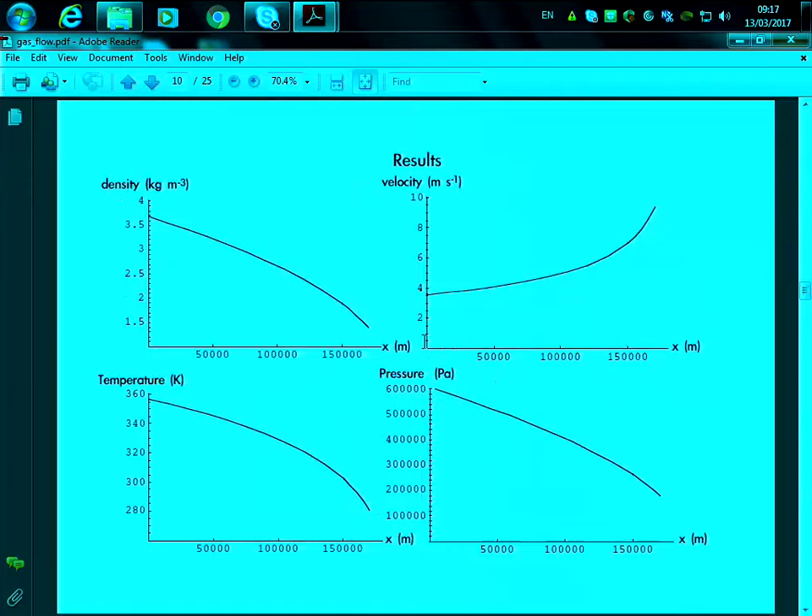So we will look at the same pipeline system that we saw in the previous lecture, but now we will assume adiabatic behavior, and we will use the cubic equation of state instead of the ideal gas law to approximate this relationship.

Again, these kinds of calculations, what you have to do normally when you have a complex problem, is define which equation of state you are going to use, define some initial inlet parameters, input that into a software modeling tool, and get the result. Normally this type of software will not solve it if you don't give the right initial conditions and select the right equation of state, to be sure you are getting a realistic solution.

So again, going back to the three differential equations used for compressible or incompressible flows, to specify the mass balance, momentum balance, and use them to obtain the energy balance. The way pressure changes with distance can be related to density and temperature changes using the equation of state, something I've already mentioned.

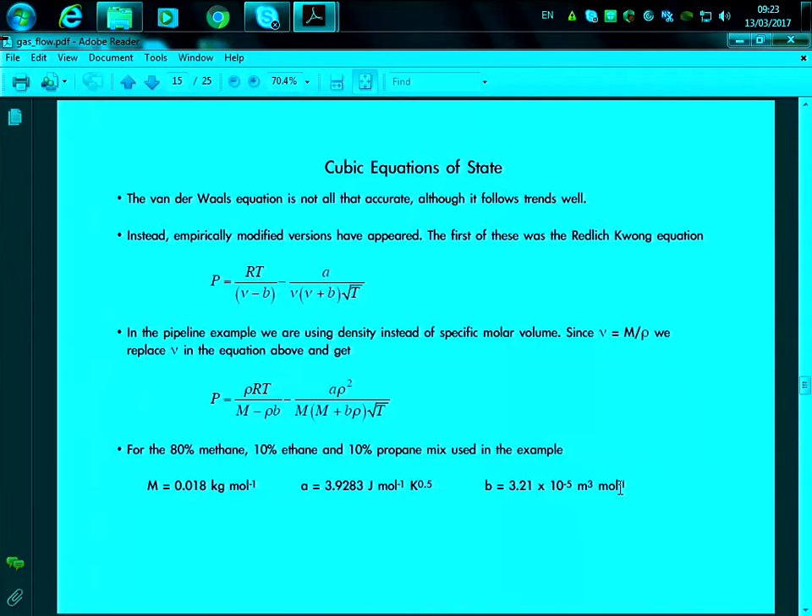So let's take an example. If we have a mixture of, for example, 80% methane, 10% ethane, and 10% propane, this will be the activity coefficient and the minimum volume defined for this property, and this will be the molar quantities going into that.

So how many solutions will an equation of state have? Do you know? As many as the order of the equation. So how many? Three. We will have three solutions in the equation of state, in this case the cubic equation of state.

So in this case, for example, we have the approximations that were done to solve a problem with the specifications denoted before, and this is just to let you know what the three solutions will look like that you can observe. So a cubic equation of state generates a curve, and normally you will have three points where you will have the solutions.

So normally the lowest value in this case will correspond to the value of the vapor density, and the highest value will correspond normally to the liquid density of the system. If we go to pressures above the critical point of the system, then we will in fact get 3 answers, but 2 of them will be imaginary. So above the critical point we actually get only 1 answer, which is correct, which will be a real answer in the system.

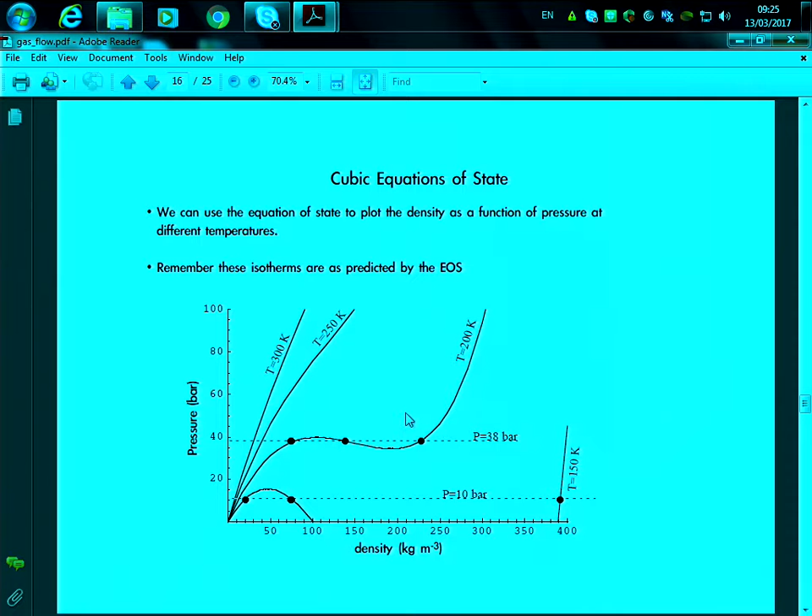So over here this will be the isotherms at constant temperature, so we can see the different temperatures and the isotherms, basically, and how the system is solved.

Now, why do we need to account and use a cubic equation of state? This is basically a chart to show you the changes within a system that is ideal. So this will be the density calculated using the ideal gas law approximation, PV equals nRT. And this is the density calculation using the Redlich-Kwong equation.

So we can see how this approximation deviates from 1. As we increase the pressure, the deviation becomes higher and higher. So if you were to use the ideal gas law at this pressure and the Redlich-Kwong equation, you will get 1 in both cases in terms of calculating the density changes through the system. So that means that the ratio between one and the other, you get basically the same answer. But as you increase the pressure, the answer with the non-ideal gas law will deviate from the ideal gas law.

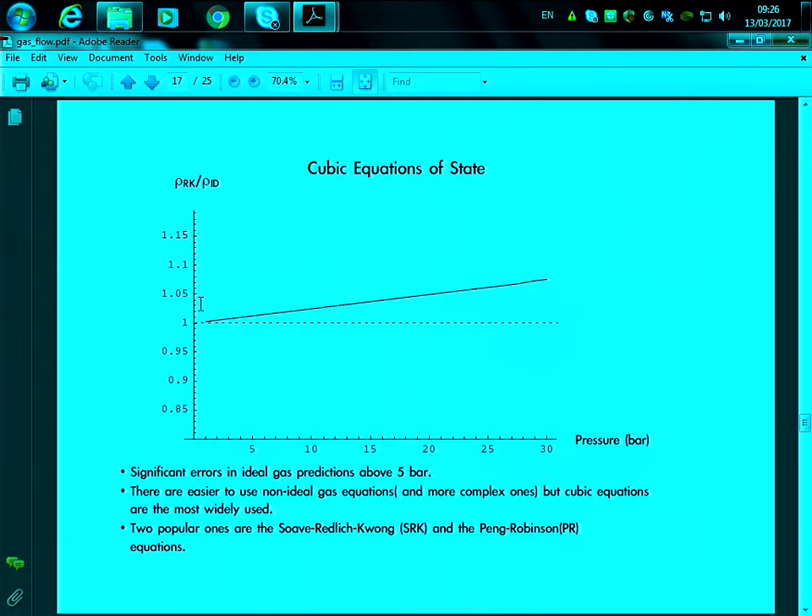And it deviates, well, let's say this is more or less 5% in this case. So that's why we need to take into account the non-ideality of the system at higher pressures.

So by substituting everything into the equations that we saw at the beginning, mass balances, momentum, and energy balances, and using the Redlich-Kwong equation, we get this type of approximation. This basically tells you the differential of the changes of pressure through the distance will be related to the changes of temperature through the distance and the changes in density through the distance as well.

Normally, in order to make this system a little bit easier to solve, we can define two variables, kappa 1 and kappa 2, and define our equation as the changes in pressure over the length of the pipe will be kappa 1 times the differential of T over dx, and kappa 2 times the differential of density over dx. So basically we're substituting these very large equations by these variables in order to make an easier expression.

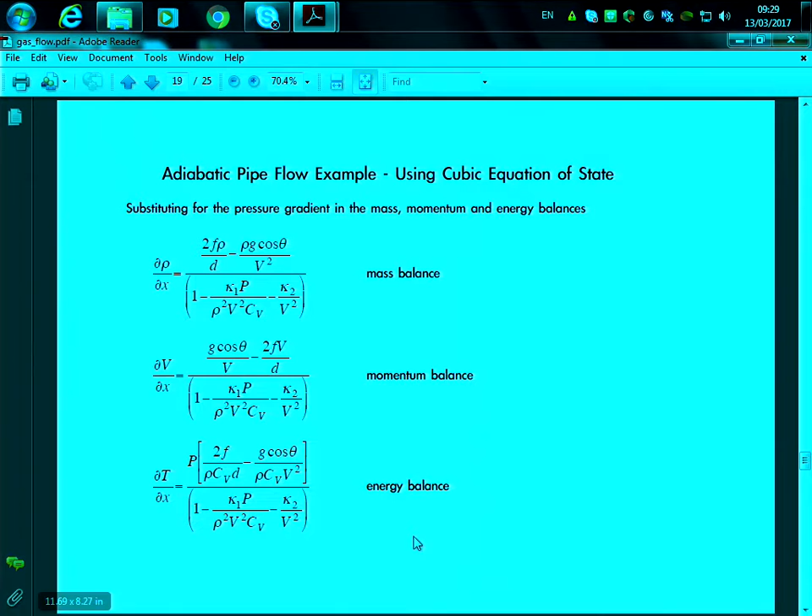So substituting the pressure gradient in the mass, momentum, and energy balances, we basically get these equations with the kappa terms in here, and that will be the system that needs to be solved for the pipeline. So we will look at the changes of density through the length of the pipeline, the changes of velocity through the length of the pipeline, the changes of temperature through the length of the pipeline, and the changes of pressure that was in the previous equation.

So the model will basically give us these results where we have a chart which tells you the changes throughout the length of the pipeline. So here we have the changes in density through the length of the pipeline, changes in temperature through the length of the pipeline, pressure, and changes in velocity, which you can now look at these relationships and see whether they make sense or not.

So as the fluid goes through the pipeline, is it right that the pressure is going down? Will it be coherent? And so why is the volume going up? The gas is expanding because it's losing the pressure. Now, why does the temperature decrease as it goes through the pipeline?

Expansion. The density of the gas reduces. Because of the surrounding... No, this is adiabatic, an adiabatic system.

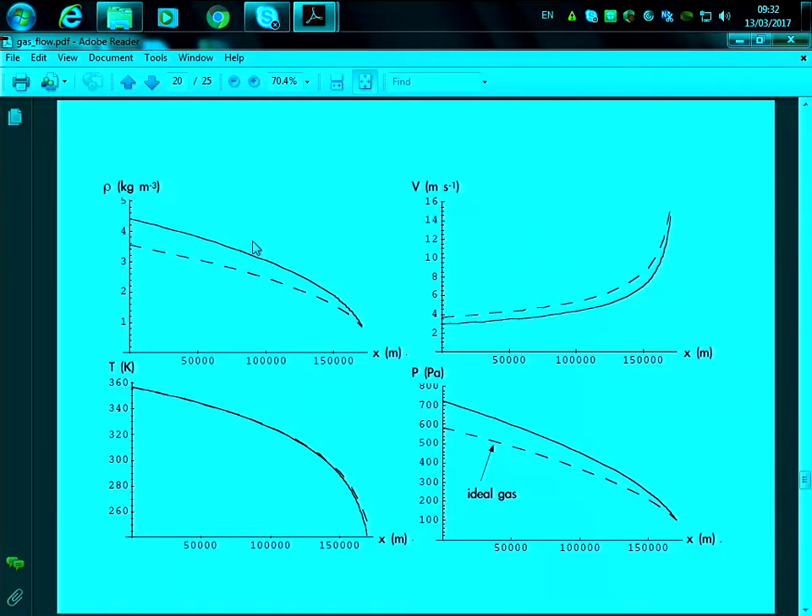So here we have a comparison between the ideal gas and the cubic equation of state, and basically these will be the conditions. In the cubic equation of state, if you remember the problem we had before, we needed the inlet pressure. What was the pressure in order to solve this? Here we solve it as the ideal gas law, and now we are solving it as the cubic equation of state.

We can immediately say that the cubic equation of state is telling you that you will require a higher pressure. So if you were to use the ideal gas law and buy a compressor, perhaps your compressor will not achieve the pressures that you require to deliver at the conditions that you want. So the cubic equation of state in this case will be a better approximation and will give you the right work that you need.

Now the density of the outlet, the velocity of the outlet, and the temperatures of the outlet also changed between the cubic equation of state and the ideal gas law. So the majority of the differences will come from the inlet pressure, which in this case will be 20% higher, and the outlet temperature, which will be lower in this case.

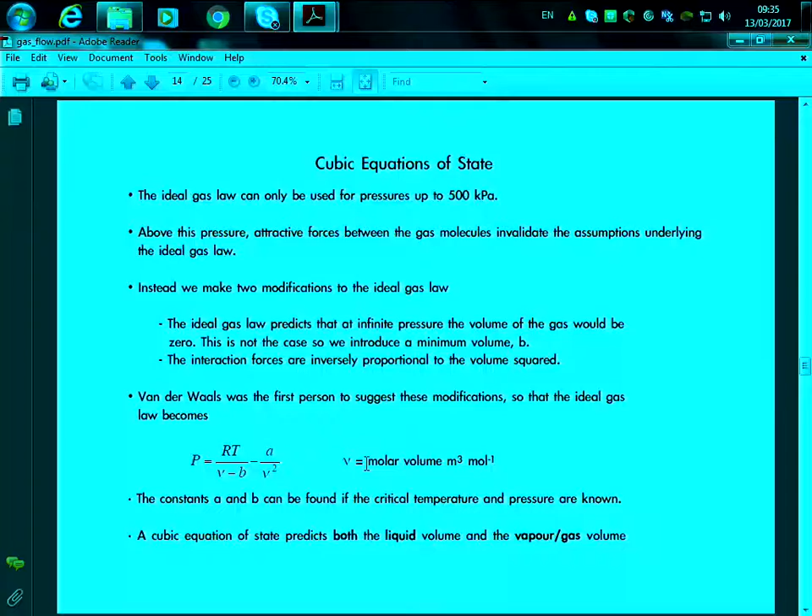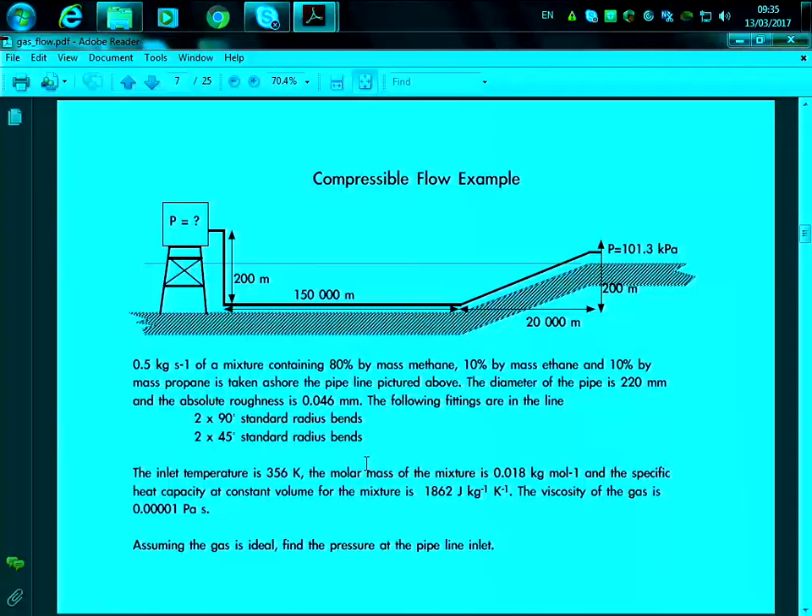Remember the last problem we solved on Wednesday. We actually wanted to deliver at atmospheric pressure, and we wanted to know the pressure at the inlet needed to go through the whole system and deliver at atmospheric pressure. So last time on Wednesday, we approximated it using the ideal gas law, and this time we approximated it using the cubic equation of state. We're looking at the differences that a cubic equation of state or an ideal gas law approximation will give you.

So the most important thing as engineers is actually selecting the right equation of state to use for the system. In this module, we're just going to look at these two equations of state, but there are thousands of equations of state depending on the fluids and pressures you are working on. When we go to the HYSYS software, you will see there's a list of equations of state, and you only have to select the one you want to use.

So that's basically how we use modeling software in order to solve compressible fluids, when we take into account the changes in volume.

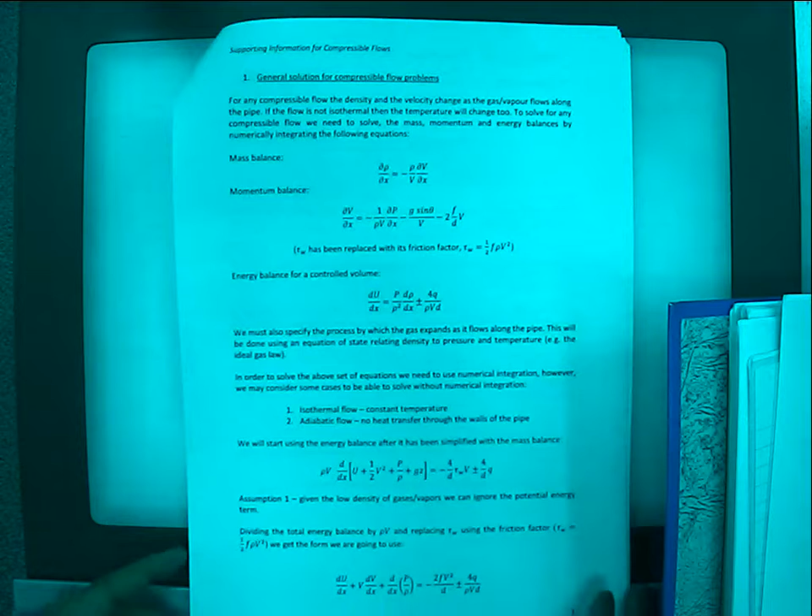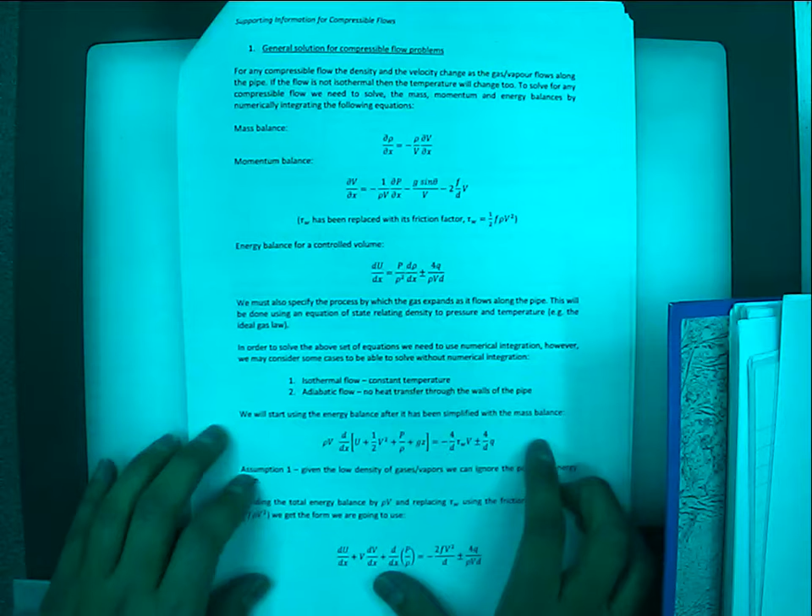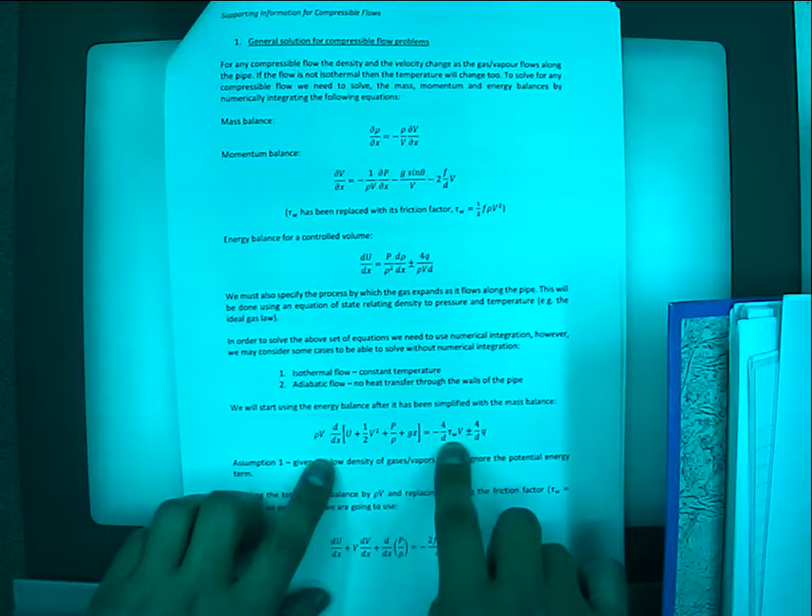So you have your handout in there, and basically, if you remember, this is the general energy balance, right? Internal energy, kinetic energy, pressure energy, potential energy equals friction through the pipeline plus heat flow in there, right?

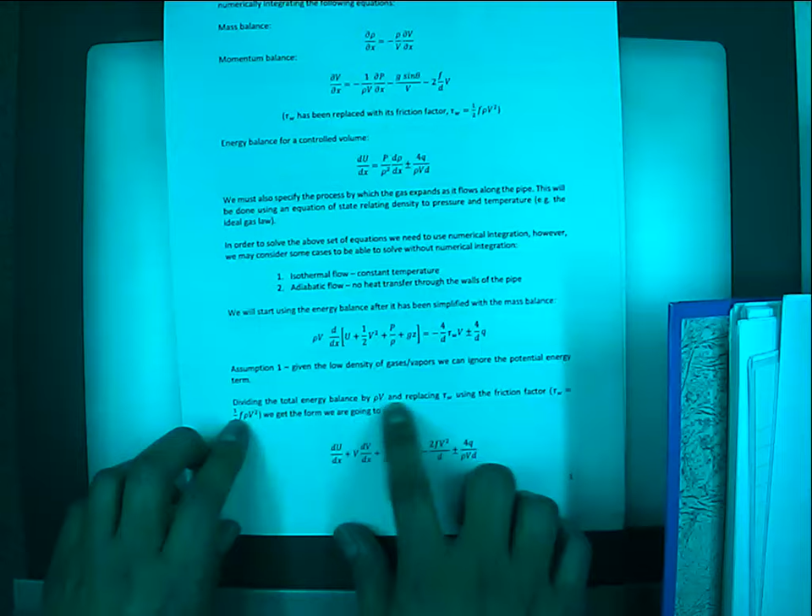So if we make this assumption, given the low density of gases and vapors, we can ignore the potential energy term—we take it out because of the very low density, so there's no big difference there. Then, dividing the total energy balance by the density and velocity and replacing with the friction factor, we get the form of the equation shown here.

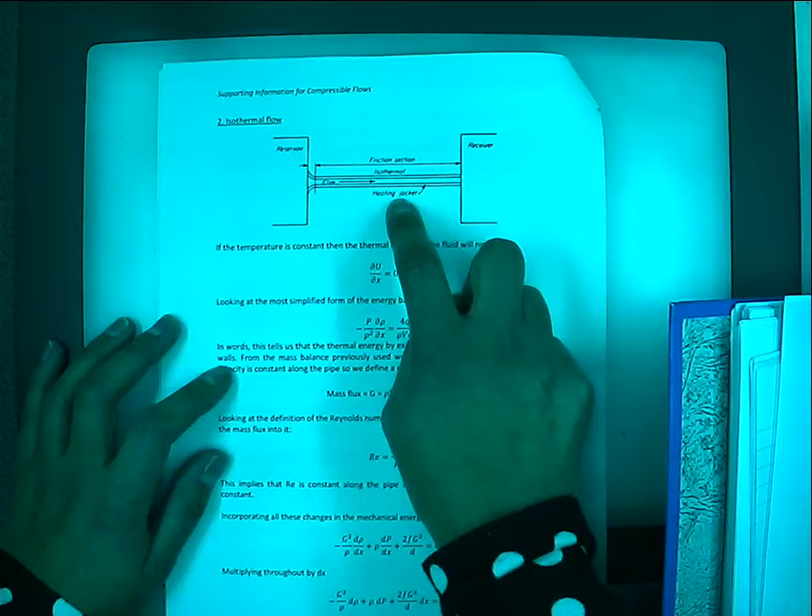Now let's go to isothermal flow. What would be an example of isothermal flow? For example, here we have a reservoir and a receiver, with a fluid going through the pipeline and a heating jacket. We maintain the temperature of the system constant through the heating jacket. So if the temperature is constant, the thermal energy of the fluid will not change.

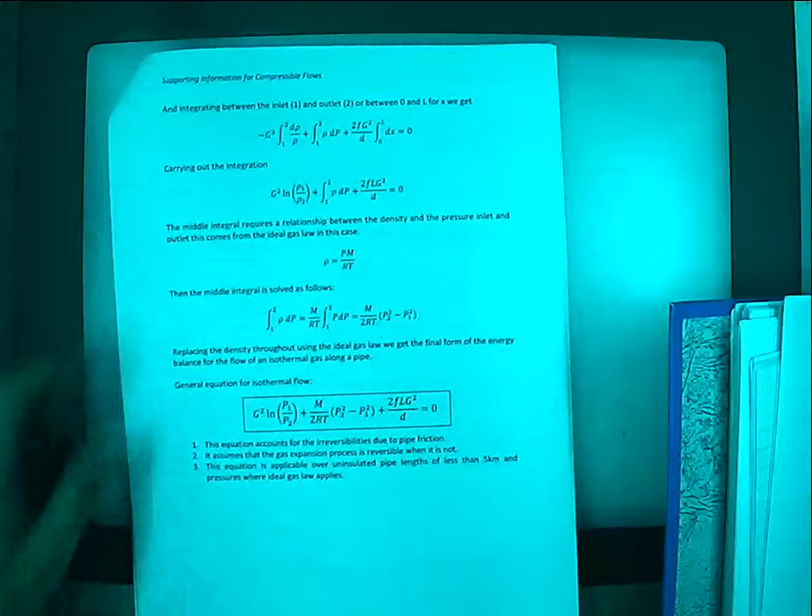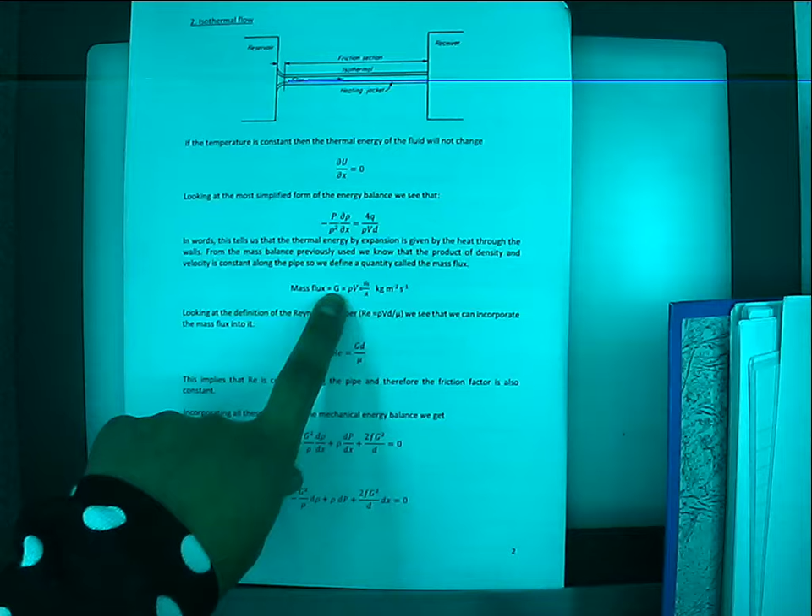I won't go through the whole mathematical procedure since that's not the purpose of this course, but you can read it yourself. The most important thing here is the definition of mass flux. When we started with compressible fluid, we said density and velocity change, but because one is inversely proportional to the other, their multiplication is constant. So we define the term G, mass flux, which is a constant variable, and it's very useful because it becomes constant throughout the system—so we substitute the G value throughout the equations.

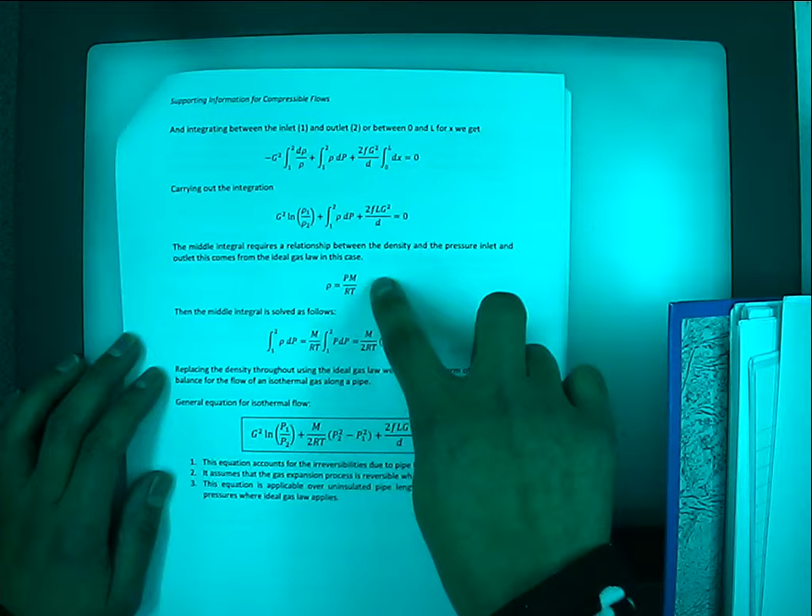We perform the integration—what are we using to integrate this equation? The ideal gas law, right? So we use the ideal gas law as the property in this case. Through the integration of the equation, we get this large equation for an isothermal flow, which is the equation we use to analytically solve an isothermal flow going through a pipeline.

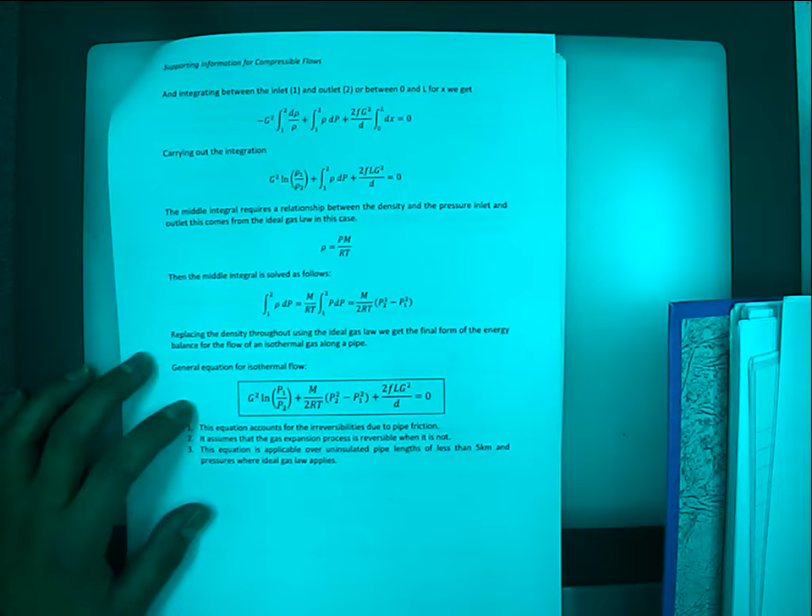Okay, so let's say we wanted the pressure at the outlet—we'll be able to take it out from the equation. This equation accounts for irreversibility due to pipe friction, and it assumes the gas expansion process is reversible when it's not. It's applicable over uninsulated pipe lengths of less than 5 kilometers and pressures where the ideal gas law applies.

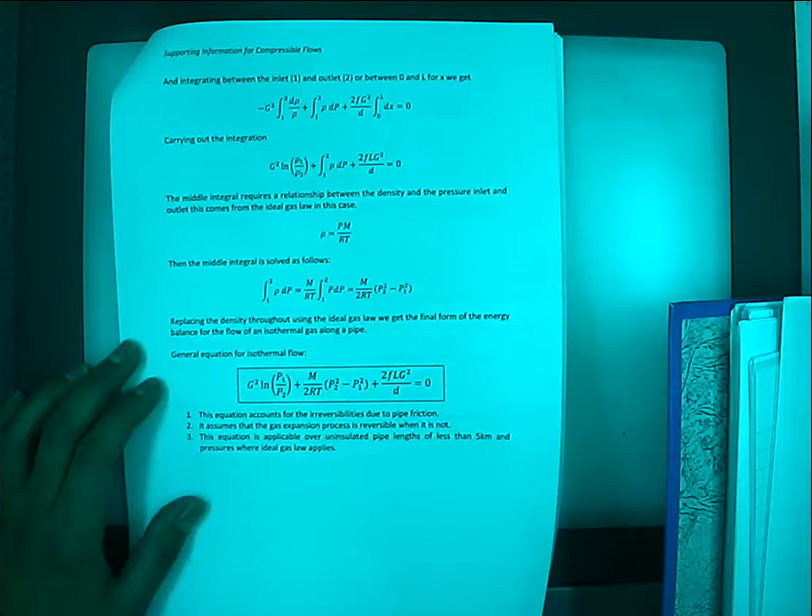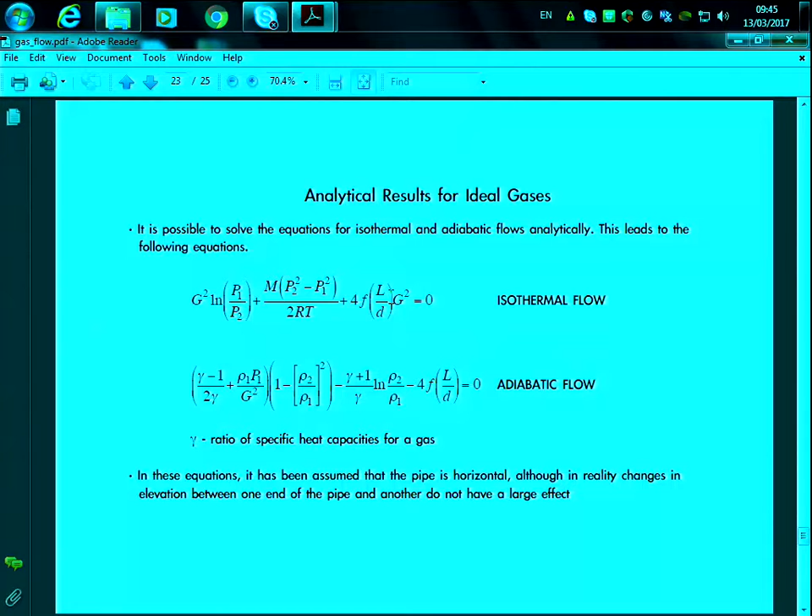So when we have a pipeline that is very short, we can assume the temperature changes throughout the pipeline will be constant. This is how the equation presented here is obtained. You don't have to learn this derivation—those derivations will not be asked in the exam at all. It's just for you to understand how these equations are basically obtained.

Again, here we have the same system—the last part is 4F. We're not defining the friction factor here, so it will depend on whether you're using the Darcy friction factor or the Fanning friction factor. I think the handout uses the Fanning friction factor, and perhaps there's also the Darcy friction factor, so it will be useful to define it. Any other questions?

So again, for adiabatic flow, we do the same. You have it here on page 4 of the supporting information.

Again, all the derivations and how we integrate and get into the final equation. I think here the most important part is the gamma that is defined into the equation, which allows us a better approximation on the adiabatic flow, and is the ratio of the specific heat capacities for a gas.

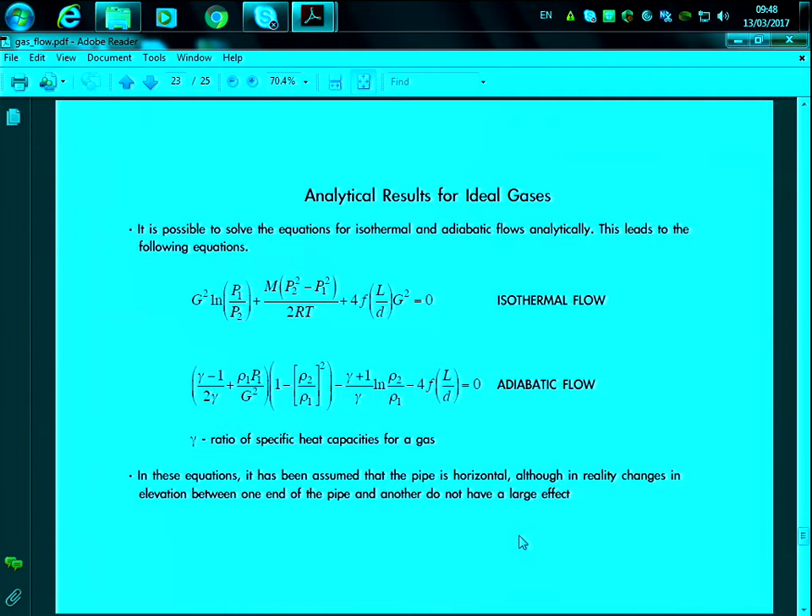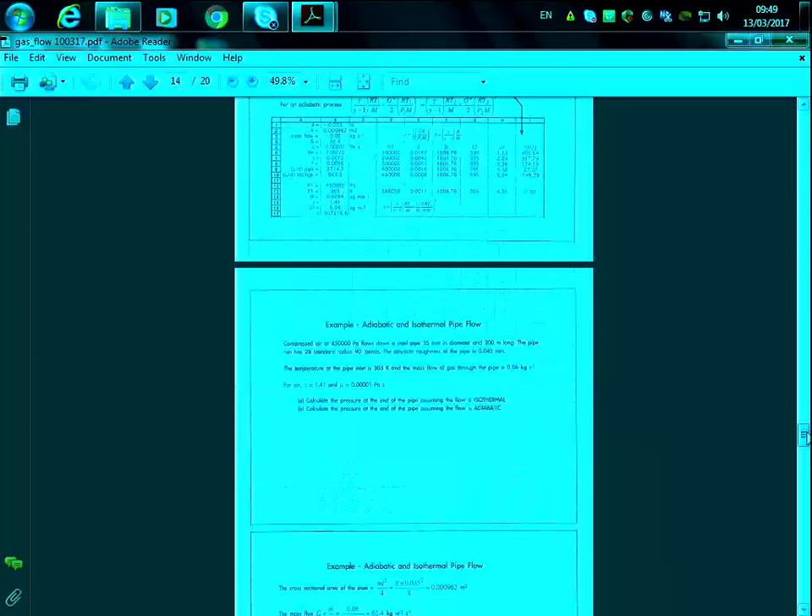So let's have a look right now at an example. Okay, so you have an example there, in the case of the analytical solution. In this case you have an example where you need to determine the isothermal and adiabatic flow.

Compressed air at 450,000 pascals flows down a steel pipe 35 millimeters in diameter and 200 meters long. The pipe run has 28 standard radius, 90-degree bends. The absolute roughness of the pipe is 0.045 millimeters.

Where's this example? You don't have it in there? Sorry, I think it printed incorrectly.

The temperature of the pipe inlet is 305 kelvins and the mass flow of the gas through the pipe is 0.06 kilograms per second. For air, gamma, the ratio of the heat capacities, is 1.41, and the viscosity is as shown.

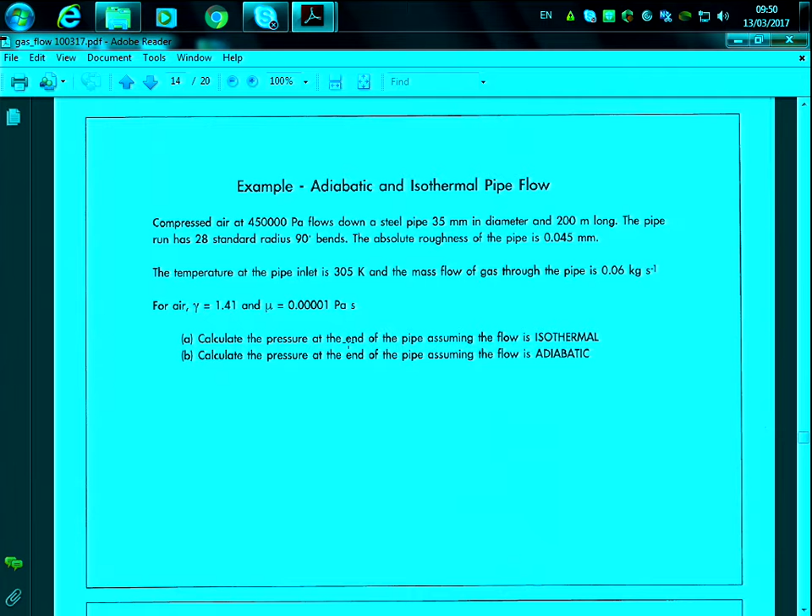Calculate the pressure at the end of the pipe, assuming the flow is isothermal, and assuming the flow is adiabatic.

So the first thing we're going to do is obtain the variables we need for the equation. We obtain the cross-sectional area of the pipe, and with this area and the mass flow, we get the mass flux, G.

With G, we are able to determine a Reynolds number, and with this Reynolds number and the relative roughness, we obtain the friction factor from the chart of the system.

We were given bends, 28 bends, and the L/D equivalent for one bend is 34.4, so for 28 bends it will be 963. The L/D of the pipe is 200 over the diameter of the pipe, and that gives the L/D of the pipe.

So here we have input everything in Excel: the diameter, the area, mass flow, G, mu, Reynolds number, roughness, friction factor, L/D of the pipe, L/D of the fittings, the initial pressure, temperature, and the molar mass.

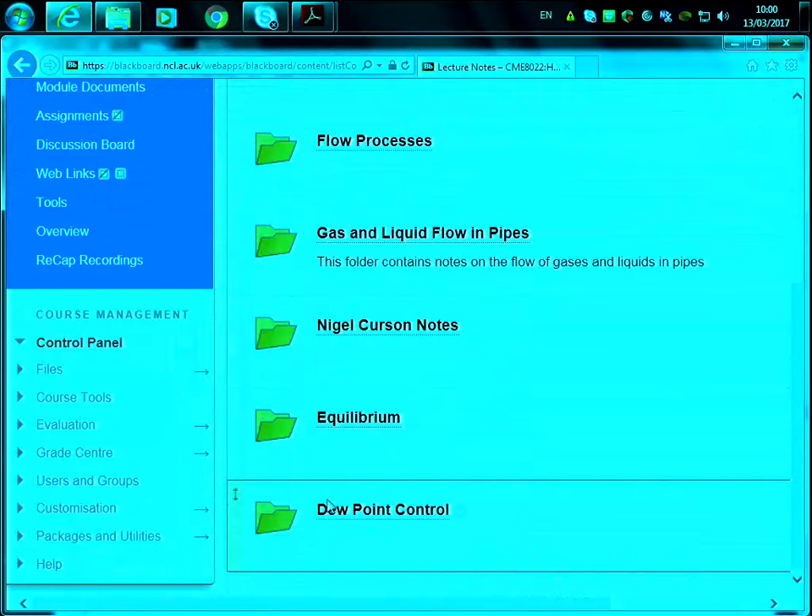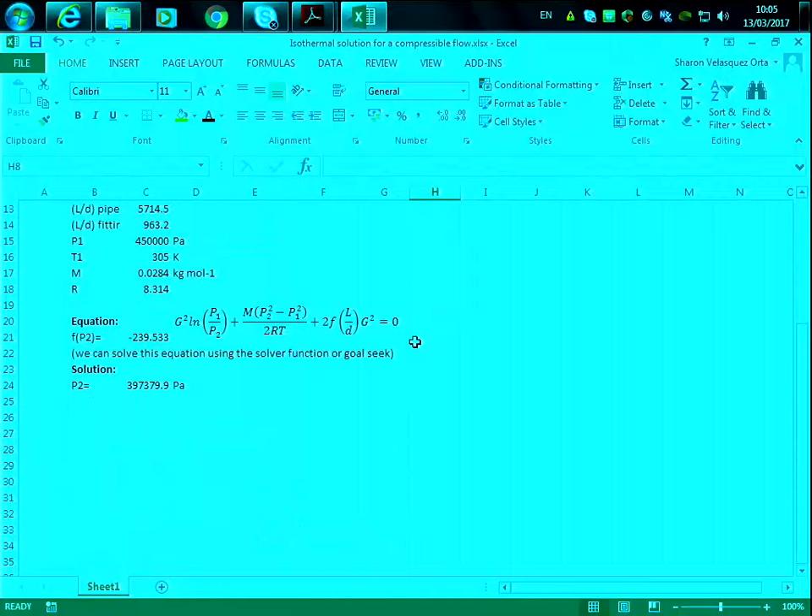Okay, so here we have the example for the isothermal process. You have all this information in Blackboard so you're able to download these files. Here we have the equation for the isothermal process and all the variables that we need. M is the molecular weight of the solution, and in this case that's the molecular weight of the air that was specified as the type of gas flowing through the pipe. So here I've put all the equation using all these variables. Can you see that?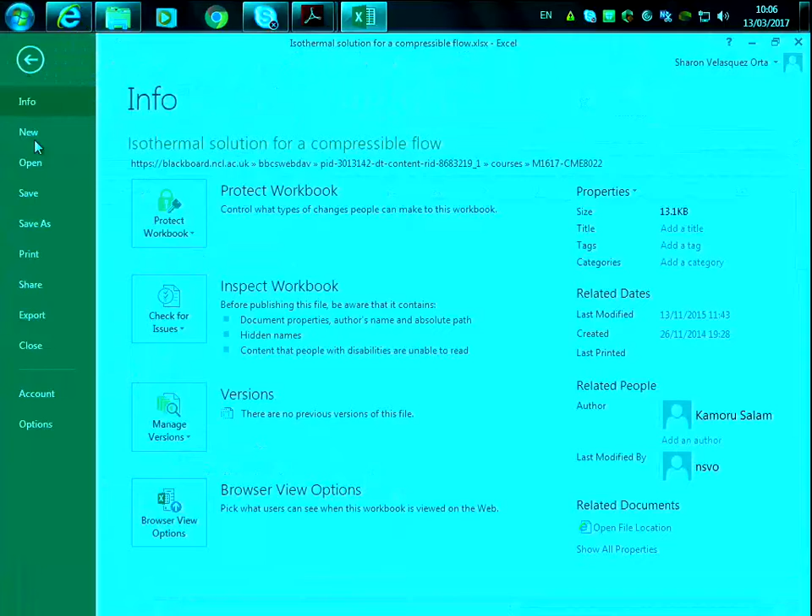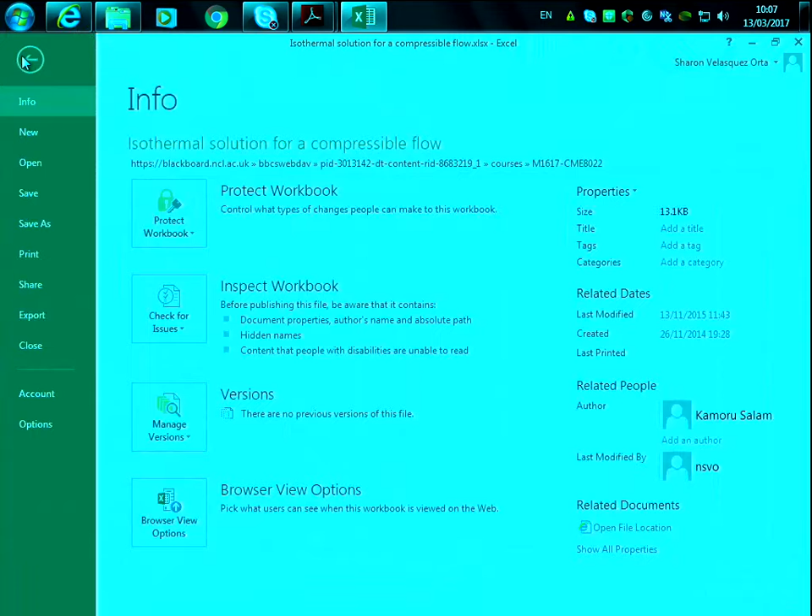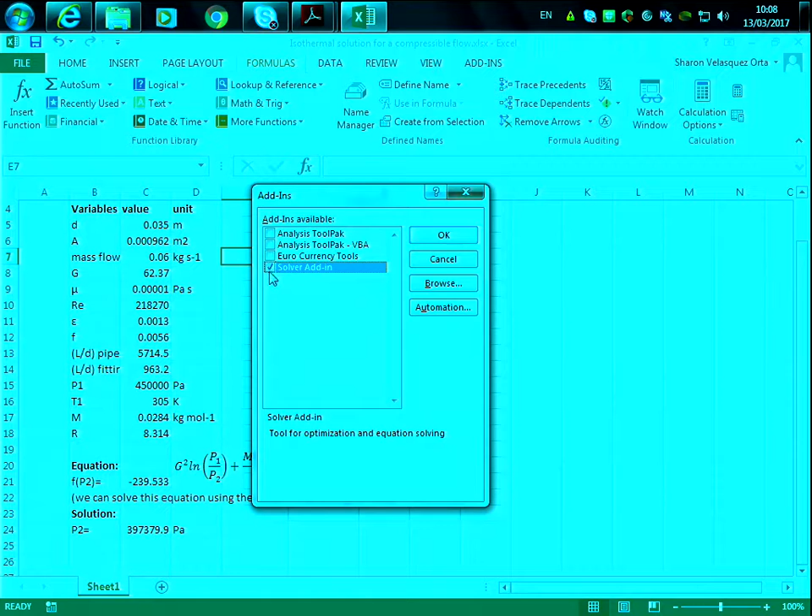And then I need the solver. I don't remember a lot, but let me see if I go to that. So I go to options, add-ins, and in add-ins there's something called solver add-in in Excel, so I select that. Is it showing now? So you have to click on here, solver add-in, and okay. Add-ins... oh, it's not here.

Where is the solver function?

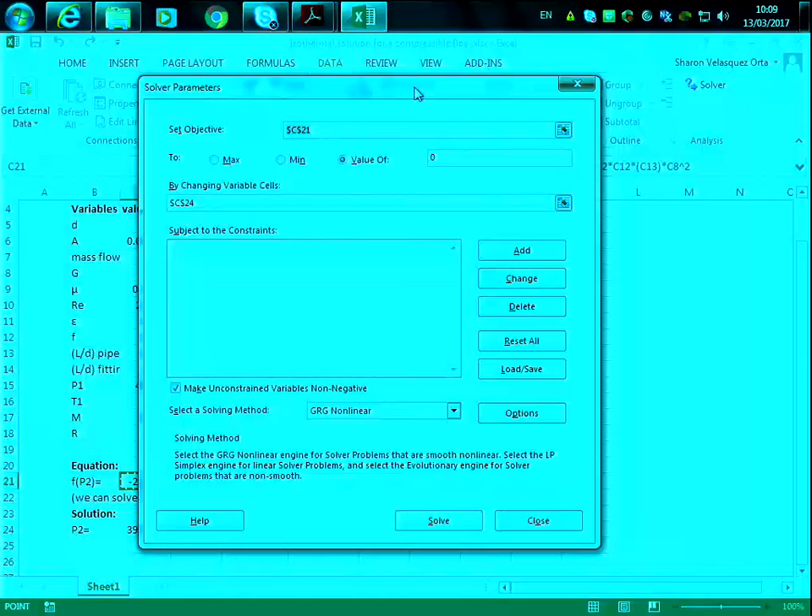So it seems that it puts it under data, and then you go to solver. You click on solver, and you have solver parameters here. So all my equation is in here, right? On this cell, that is over here. I've selected C21, and I want all this equation to converge to the value of 0.

What is the changing variable that I want? So all this equation, I've input pressure to this cell, and then I select that I want the solver function to make this equation converge to 0 by changing the pressure variable in this case. By changing variable cells, pressure. And then I can make some constraints, so I can say this pressure should be equal to or higher than 0, so it doesn't converge in negative values.

So I can select the solving method, but I'll just use that, and then I click solve. And then it has converged this equation to 0 by changing this pressure 2. So how much do you get in the handout time? 387,963, 397,433.

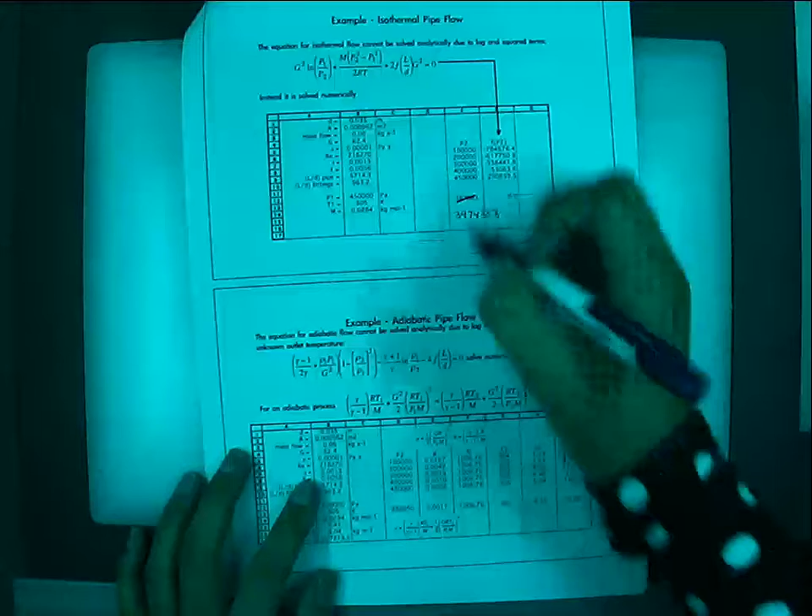So that will be the value, let's see if I input this. So no, minus, yes. So that will be the value. The actual value that is here is not correct, it won't converge at that value. Okay, so change it to 397,433.8 Pascals.

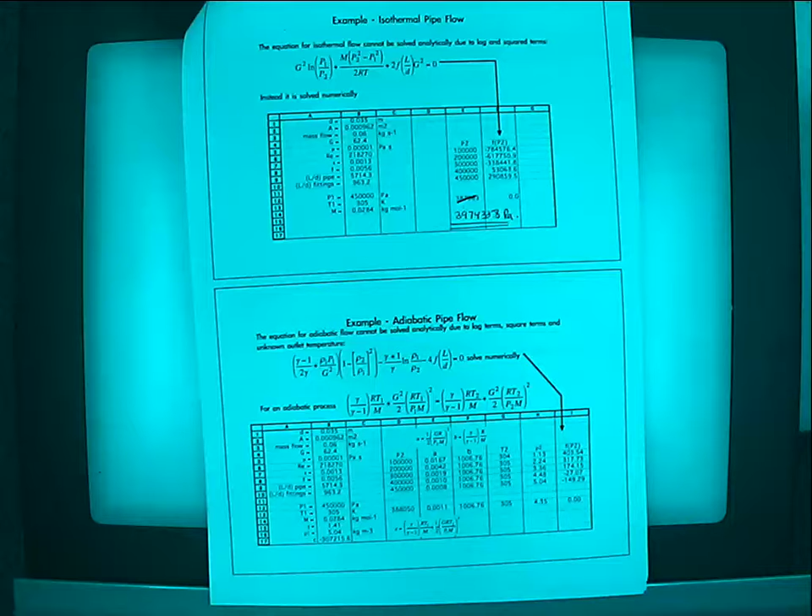I'll come back to this value because I think that with my writing...

Is that clear how I selected the solver function and how I made it work, or do you want me to repeat it? Repeat. Okay, so should I go to File?

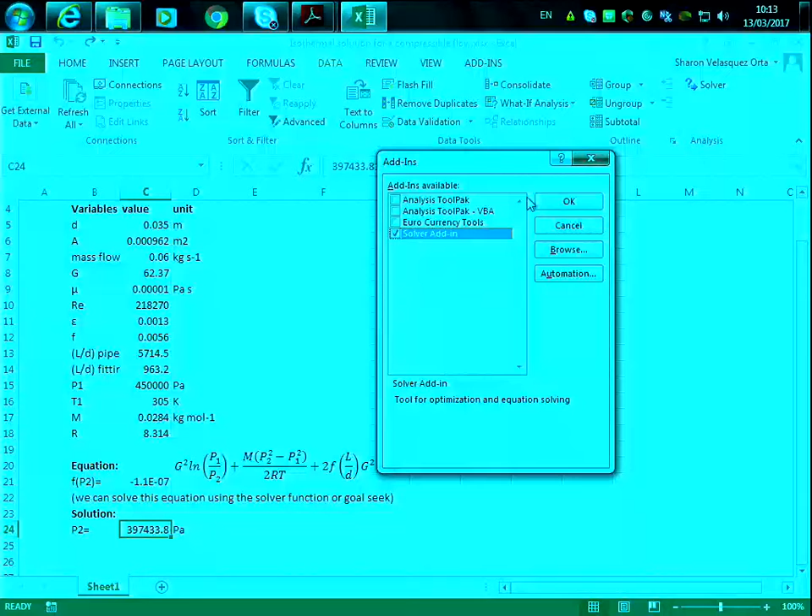Then I go into Options, okay? And then I select Add-ins, right? In Add-ins, I think that we need to go to Excel Add-ins. And then we can have these add-ins: Euro currency tools, analysis ToolPak. So we'll select solver add-in, and we click on OK.

So when we click OK on the solver add-in, that will appear in the data toolbar. So now what I need to do is that I've typed in my equation inside this cell. So if we look at this equation here...

And this equation here, so it's G squared, where is G? C8 squared, natural logarithm of pressure 1 over pressure 2. Plus M, which is molar weight, times pressure 2 square minus pressure 1 square.

Pressure 2 is not given, so... but I was supposed to, yes. Pressure 2 is not given, but then let's say this is not given. I'll get div by 0 because it's impossible, so I'll just, for the sake of not getting that, pressure 2 is not given, but I still need to put a cell because that's the variable that I want to find out, basically.

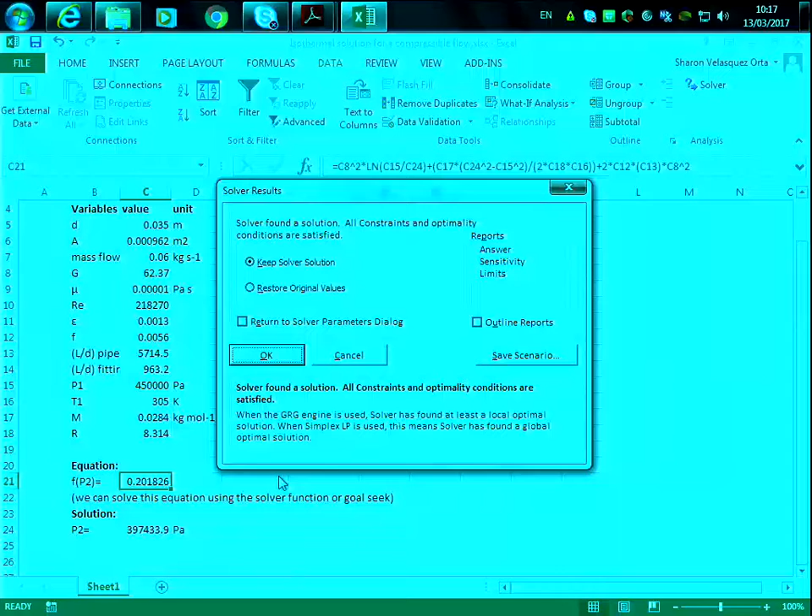So that will be 0.00000000. Yeah, I know, but it does converge to 0. Now, it will depend a lot on the initial values. Now you have seen that I've given an initial value of 100,000, I think. So this one is converged to 0.2, so it's not converging completely to 0.

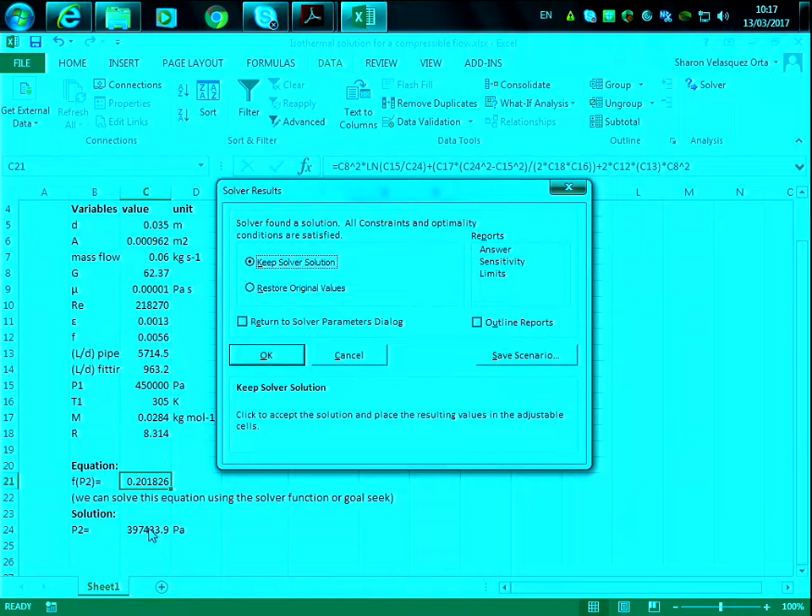So it's asking me if I want this solution, or if I just want to cancel it. So I can cancel it and then start with 300. We need to start with 300.

Well, the problem is that it doesn't matter when you start, but depending where you start is how the iteration is going to converge, basically. So if you remember last time, I started with 100,000 and it ended up in 0.2 instead of 0.00, because it will need more iterations to actually get to that value, then it just stops there.

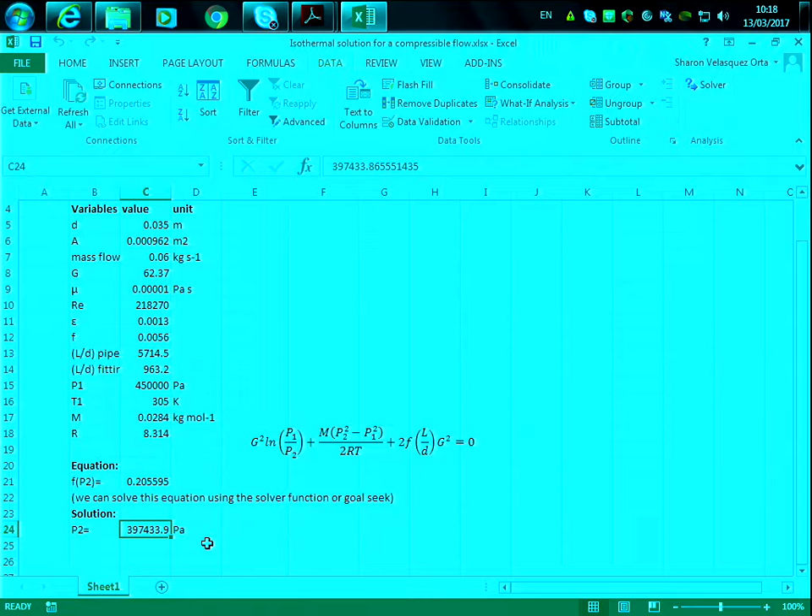397,433.8. Well, really, in terms of engineering terms, decimals here, especially for pressure changes, we never report decimals. So we stick to round values, basically.

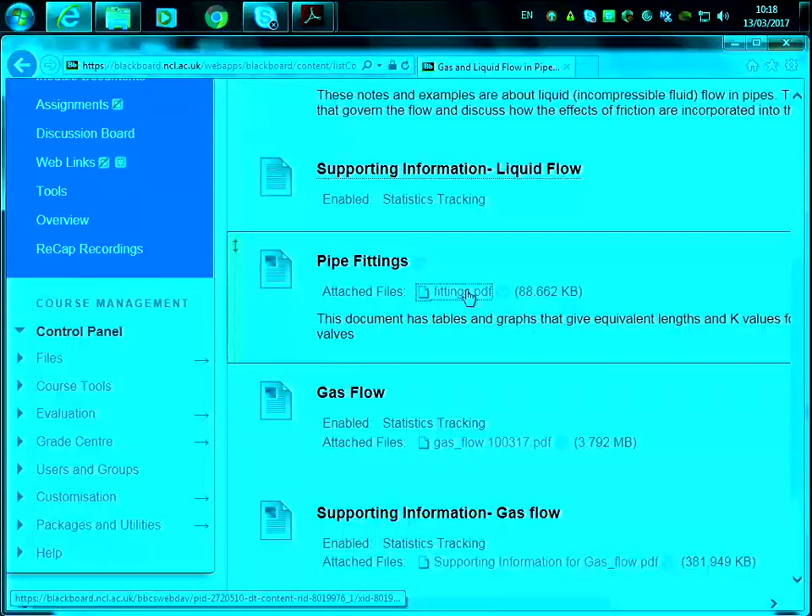So that's how this was solved through Solver. So you have all this in your Blackboard. In Blackboard you should have the slides, the supporting information.

This is something on pipe fittings on the K values. So you have here all the K and LD equivalents for fittings and valves as well.

Gate valve. Gate valve. Yes, globe valve. Gate valve is here. So here it's very important that you look at these charts because the K value depends on the opening of the valve. Obviously, if the valve is less open, you have more friction, more changes in pressure than if the valve is more open. So actually, the K value changes according to the opening, having the lowest K value at the highest opening and having the highest K value at the lowest opening.

So you have that as well in Blackboard. The gas flow handout plus the supporting information and the examples of the gas flow that we are looking right now. Okay, so you can go again into Excel and try the solver function just to see whether it works.

So now let's have a look at the adiabatic solution of the pipe flow. In this case, we have this equation that we need to solve numerically.

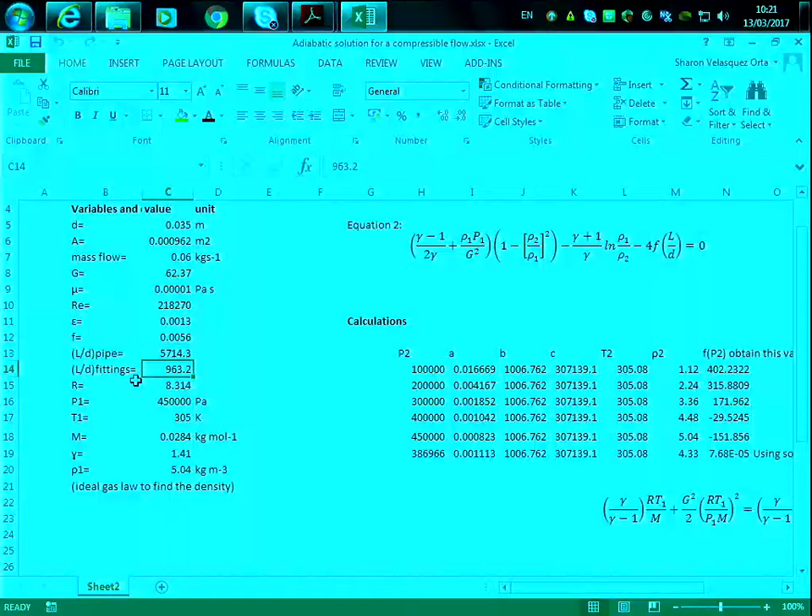And basically, the way we are going to solve it is that we will input again all the variables in the system. So diameter, area, mass flow, mass flux, viscosity, Reynolds, relative roughness, friction factor, LD of pipes, LD of fittings, R, ideal gas constant, pressure of inlet, temperature of inlet, molar weight. And in this case, we include the gamma, which is the ratio of the heat capacities and the density.

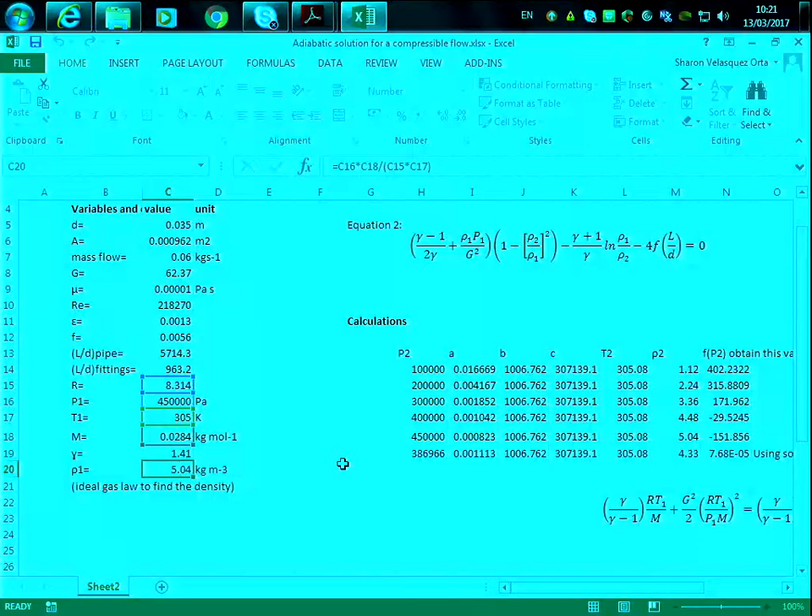In order to find the density, in this case, we use the ideal gas law. So in this case, we will have a set of equations for the temperature, for the pressure changes, and for the temperature changes, because the density is dependent on the temperature changes. So we'll need to look at the density, how it varies according to the temperature changes in the system.

So for the pressure change, are we doing the same thing that we've done before? So again, here I assume several pressures, and A, B, C is basically given, some of these constant values. A will be that value, B will be that value, and C will be that value. And basically I'm calculating the constants A, B, C, and taking all with respect to the temperature. And then with that temperature, using the ideal gas law to obtain the density. And then I input the density in this equation and obtain the pressure at the outlet of the pipe.

Okay, so I use as well the Solver function and solve it. So adiabatic flow is a little bit more complex than isothermal flow, because we also have to take into account the changes in temperature and the density changes in temperature.

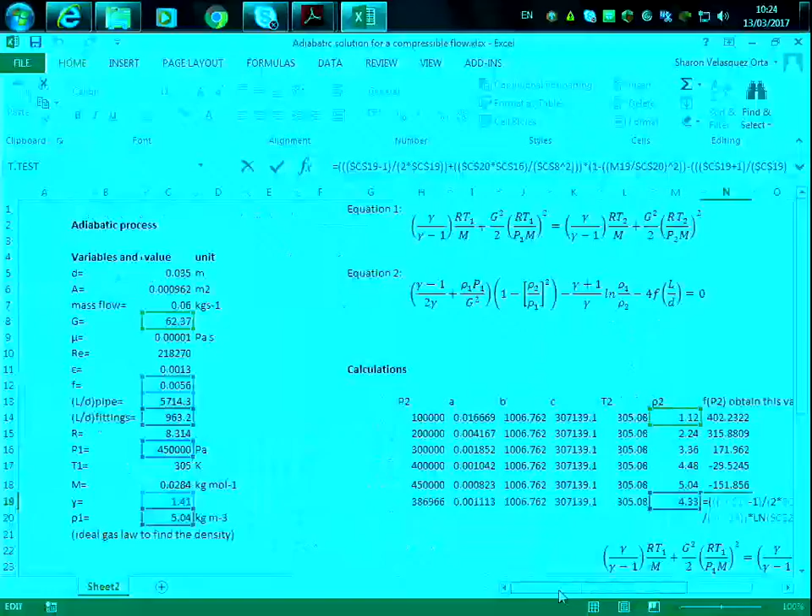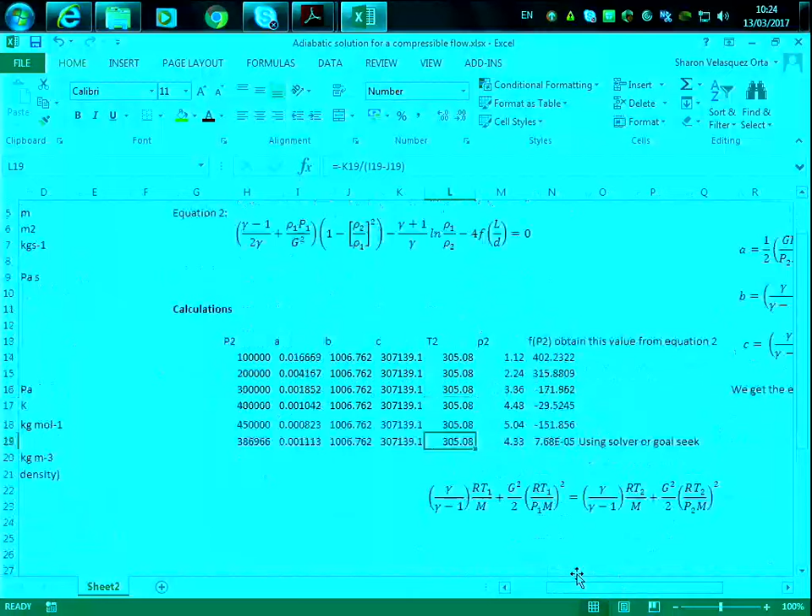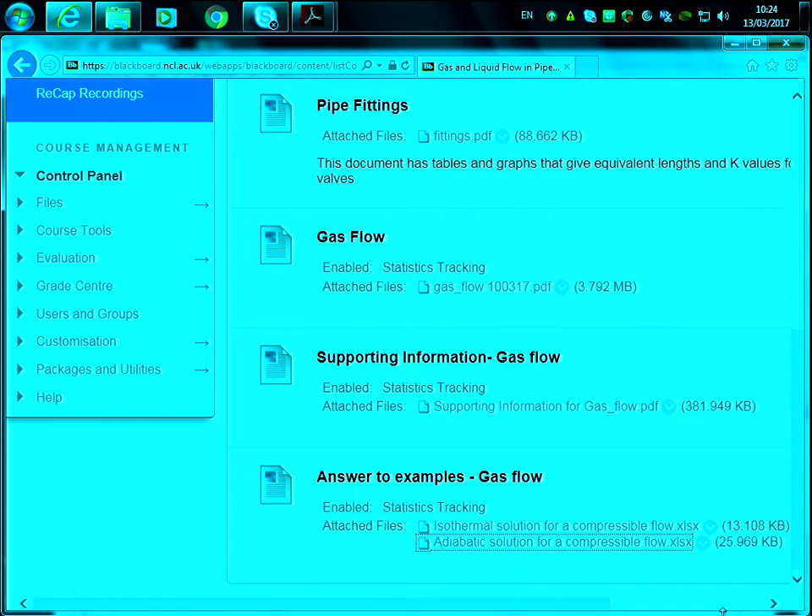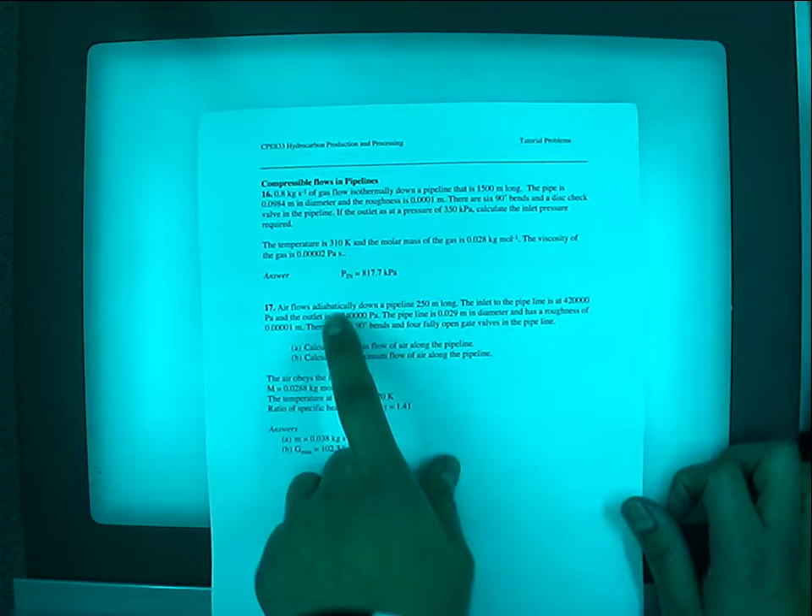Right, so you can look at this through Blackboard again, and in the handout, in your tutorial, for compressible flows, you have isothermal, so this will be an isothermal flow and an adiabatic flow. So just one example calculating it isothermally and another one adiabatically. So I suggest you do this week, and next week, if you had problems with that, we can go through that.

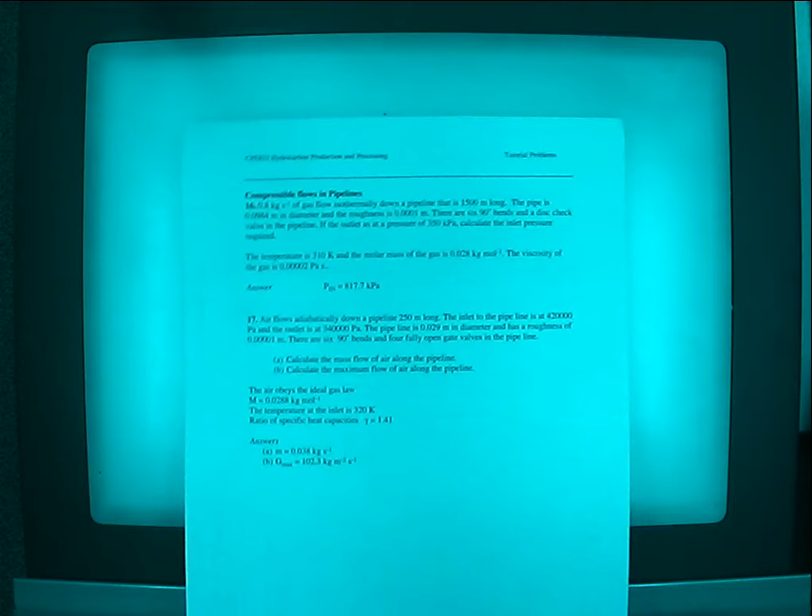So 16, 17 - 16 and 17 is compressible flows, so it will be this part. So I suggest you do these two, especially right now. And 14 and 15, they are non-compressible flows, so it's a little bit easier to obtain.

Assignment. Okay, so now we'll go to the assignment. So I'm not sure if I have enough.

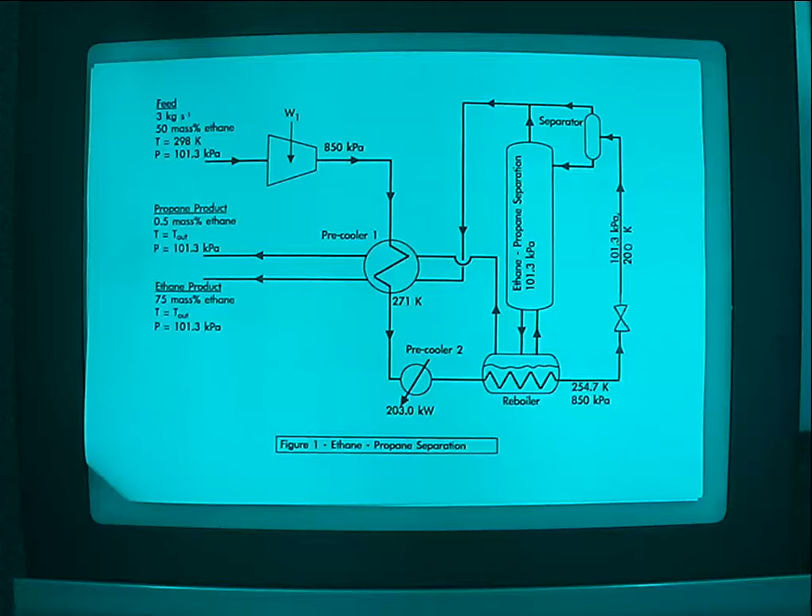Now, what do we have for the assignment? Basically, this is a collection of the flow processes that we have seen throughout this module. I think the only part missing here is pipeline pressure changes, which you don't require to calculate. This is why you should finish the tutorials on compressible flow, because you won't rehearse those ones here.

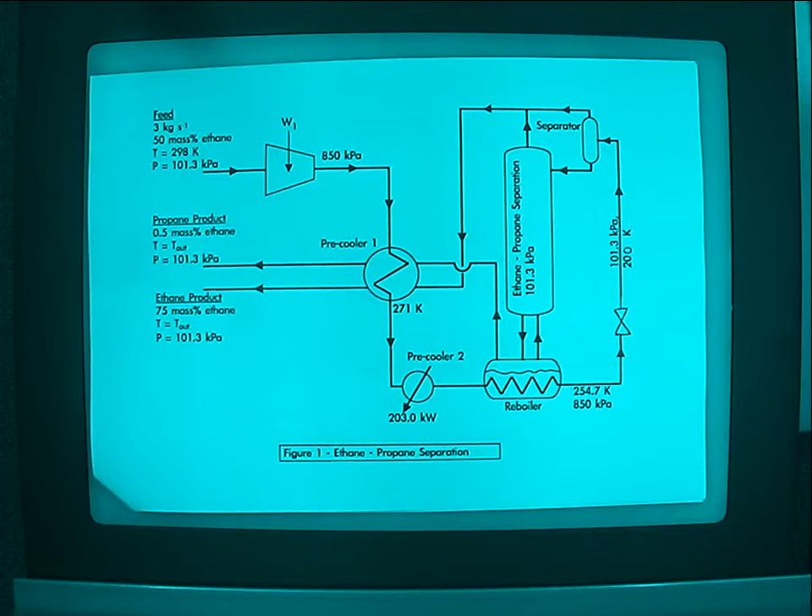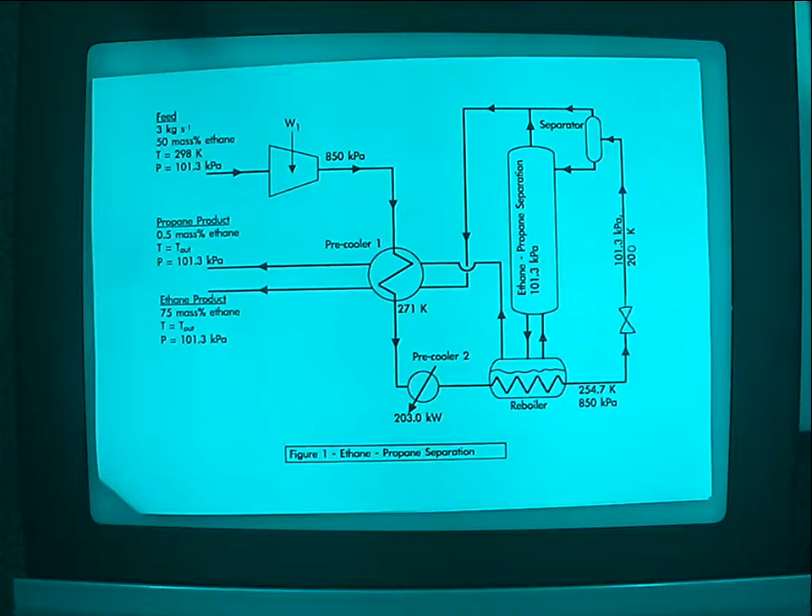So basically, you have this process flow sheet, and you will need to obtain all the components throughout the flow sheet, doing mass and energy balances, and give the temperature changes, pressure changes, and flow fractions around it. We have a system which receives a feed of ethane and propane, and what we need to do is divide these two components into two flows. So we want to separate them. That's what we want from them.

So we have a process to separate ethane and propane using distillation, as shown in figure 1. The only thing we are still missing right now is distillation, which will be the last part. We'll start looking at it next week.

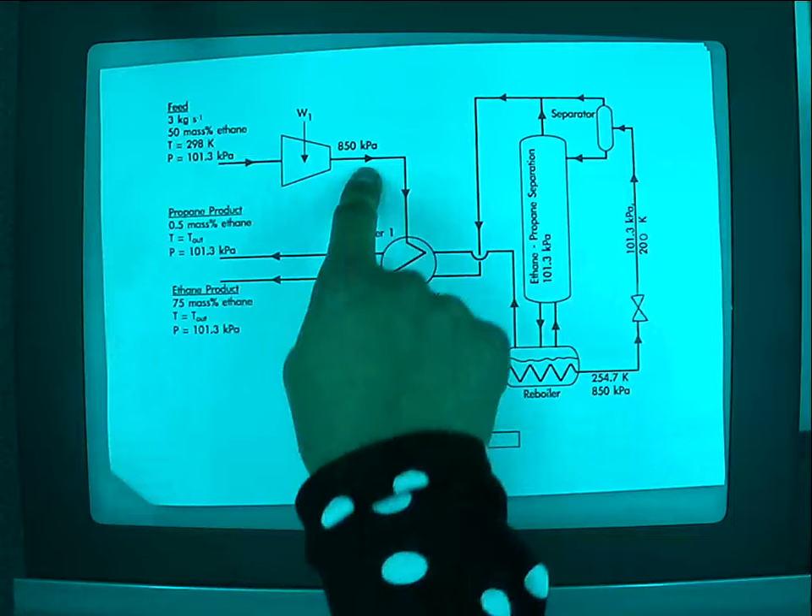In this process, a feed containing ethane and propane is compressed from 101.3 kilopascal to 850 kilopascal. So the first thing is the compressor. After this flow is compressed, what happens to the temperature? If it starts at 298, it will increase, so we have an increase in temperature, and then we have 3 pre-cooling stages.

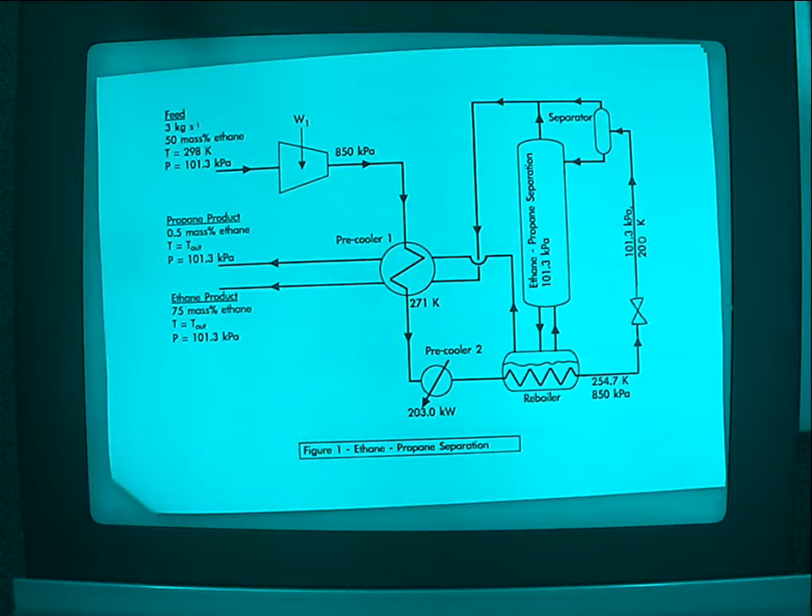So basically we have the first heat exchanger, where we cool this down - this is a bit of a heat integration system used a lot in industry, where we use flows through the system to cool down or heat processes in order to avoid utilities. So we have a pre-cooling stage where we cool down with flows coming out from the separation processes.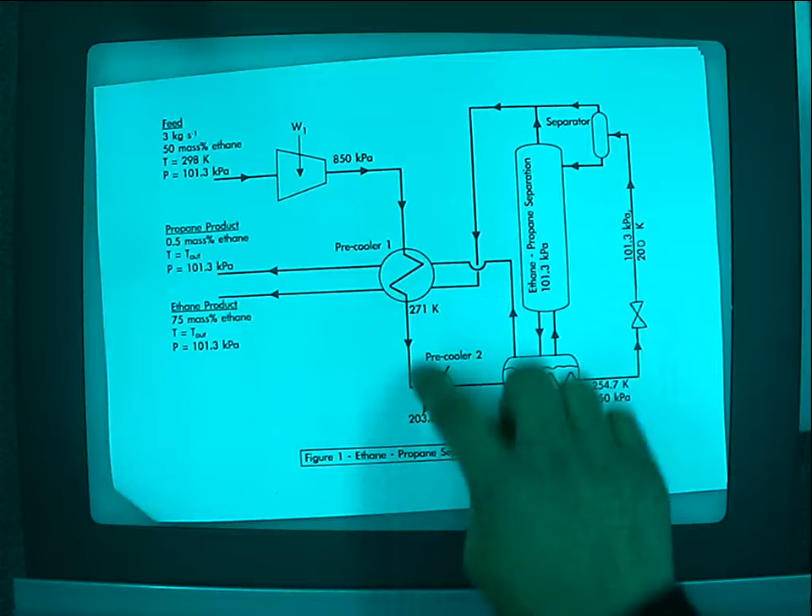Then we have a second cooler, where we cool down using a flow to another temperature, and finally the final stage cools down to 254 kelvins. So firstly, using ethane and propane product streams, secondly using a refrigerated pre-cooler, and finally by passing it through the reboiler of the distillation column.

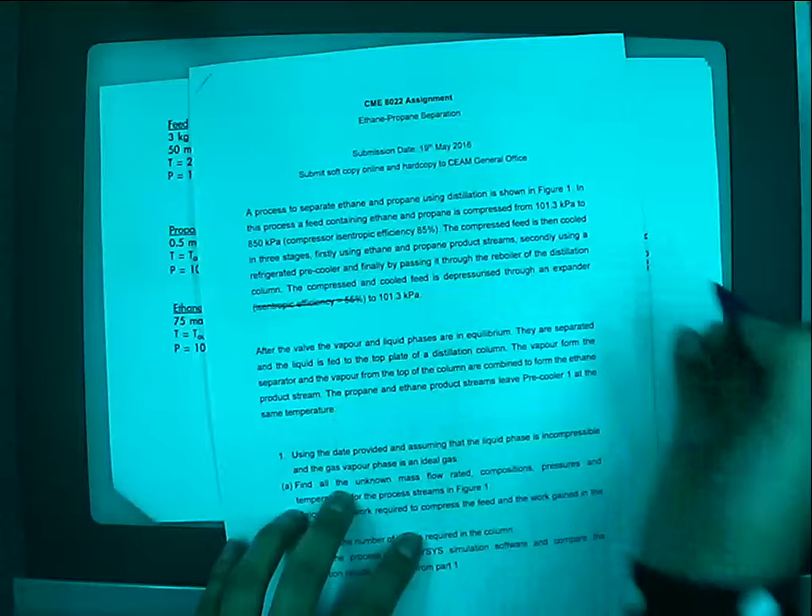So now the compressed and cooled feed is depressurized through an expander. We use a valve here to expand it again, which has an isentropic efficiency. In this case, I'm not sure if you need the isentropic efficiency, so please take that out from your handout.

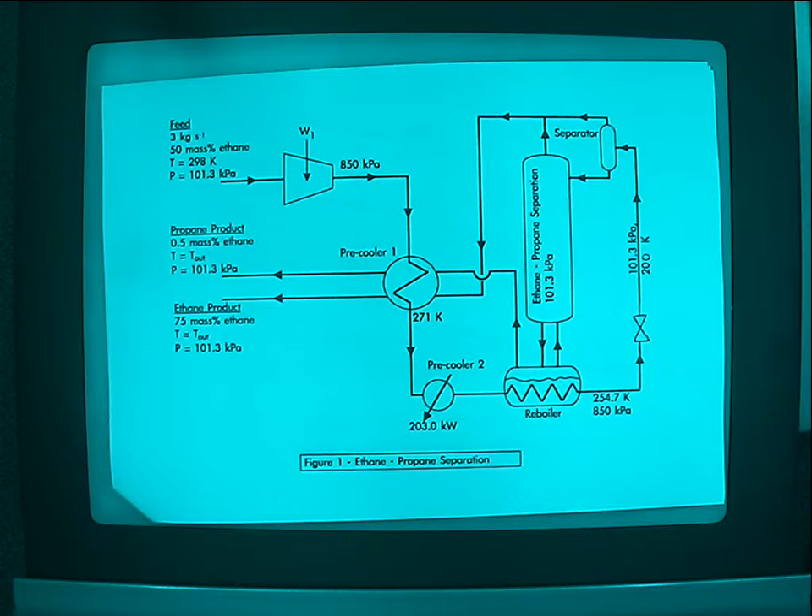Which one, efficiency? You don't need it there, it's just the valve - you're not producing any work. So it goes to 101.3 kilopascals and 200 kelvins, further cooled down by this expansion.

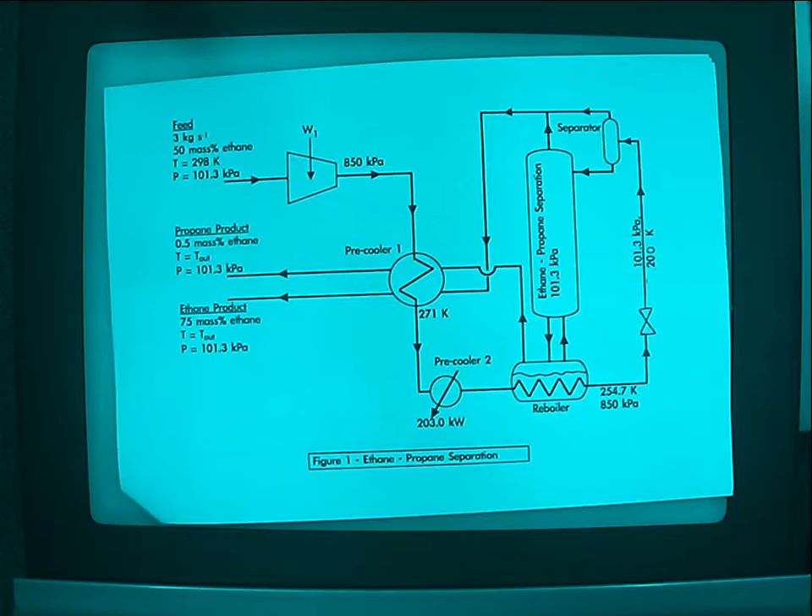After the valve, the vapor and liquid phases are in equilibrium, and they are separated. The downside is liquid, and the vapor goes up and out to the outlet, while the liquid goes down. Then from this one, you have a further distillation, where you have the liquid part as well.

So here the propane is going through here. The propane and the not-propane in this case will be the ethane. Mostly the ethane will go through here.

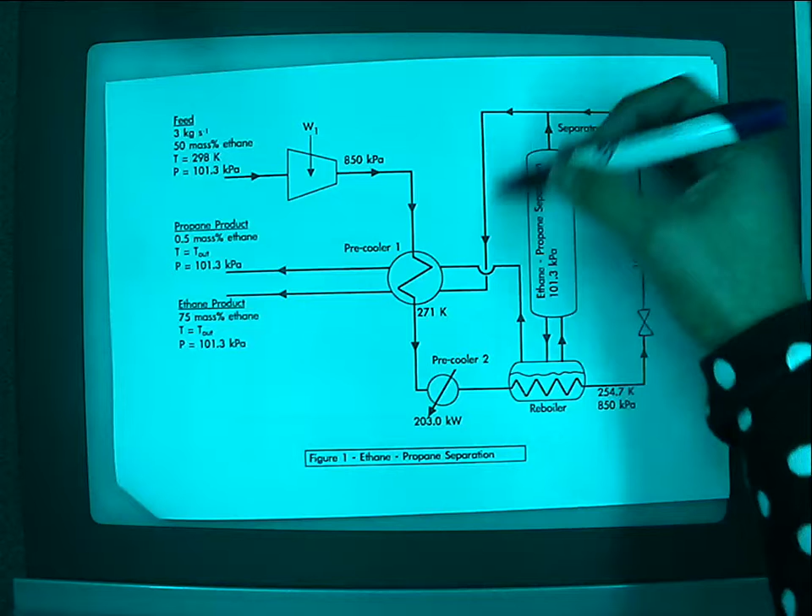Okay, yes, I think he went a little bit. So we have the valve, and then we have vapor liquid phases in equilibrium. Okay, so they are separated. The vapor goes through the outlet, and the liquid goes through a distillation system, right?

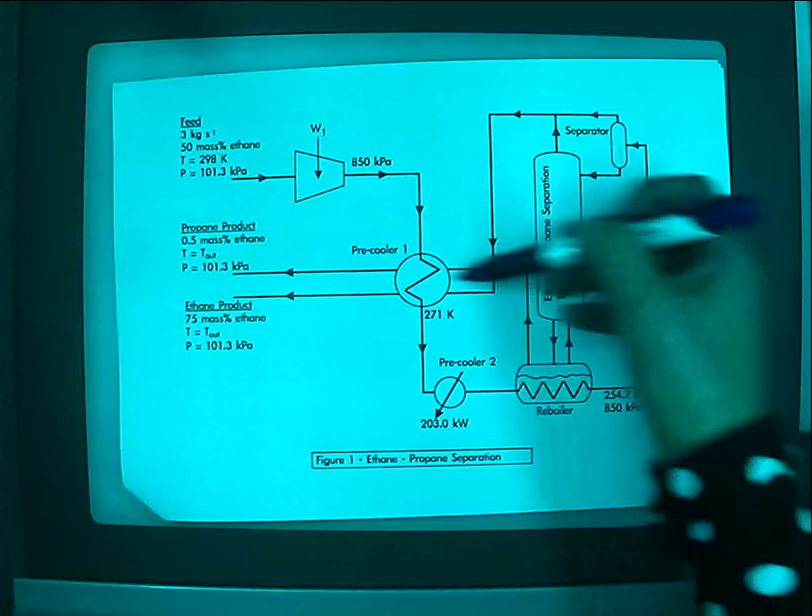So the distillation system will basically further separate to get you a higher fraction of propane product in here, and whatever went as vapor, in this case the ethane, will go through the system through the vapor. So this will be a vapor, that will be a vapor, and they will come together in this case.

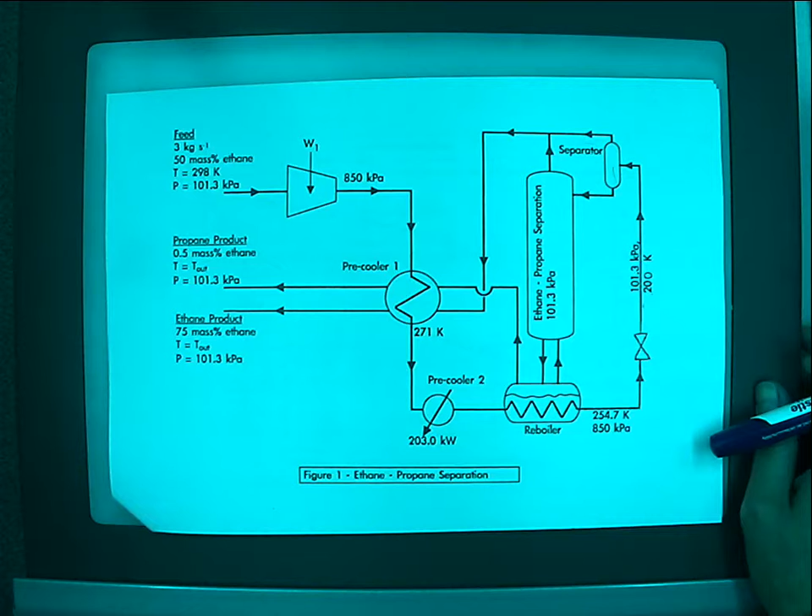How are we separating this? Are we heating up or is it by gravity? In the distillation column, through changes in boiling point.

So yes, this part you still don't know how to calculate, because that's what we are going to learn next week, the following weeks. So please don't get too confused on that, because you haven't learned how to obtain this part.

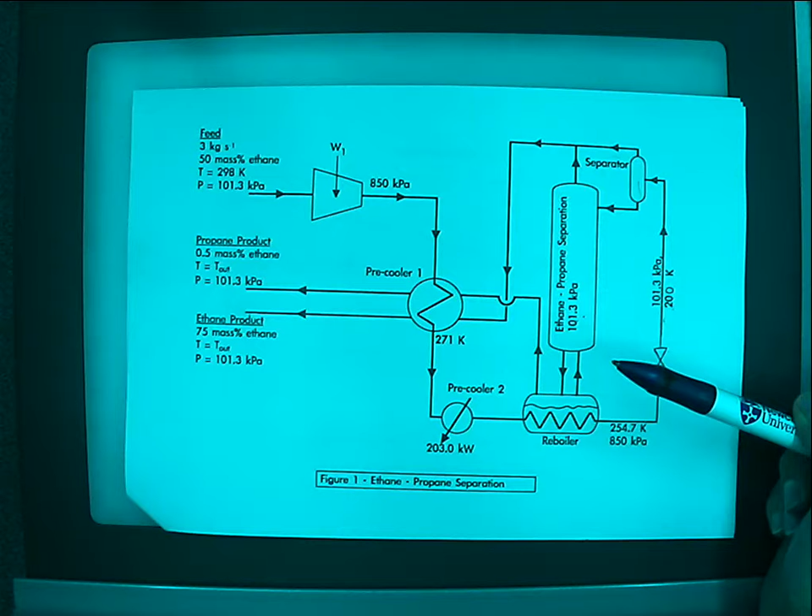But what you should be able to do now is compressor, heat exchanger, and expansion valve. Okay? So right now you should be able to get up to this point analytically. And then when we do the distillation columns in the next weeks, you should be able to calculate this part of the solution.

If you put there a reboiler, it means you should have temperature in your separation. It's through the separation on a distillation column is through the differences in boiling point of the system.

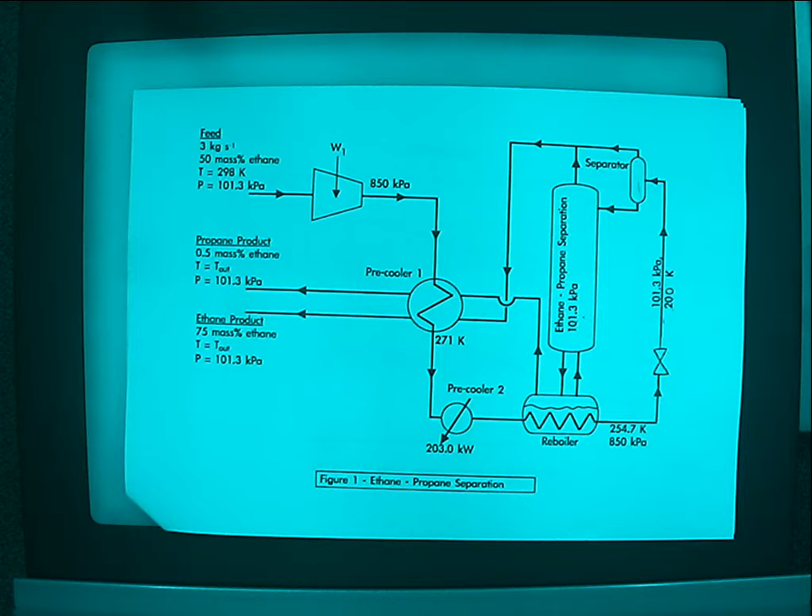So, if you go here and you write RAS, then you're able to log in remotely from any computer, and then you use the same login that you use for any of the computers here, and then you go to engineering software.

So, well, now I've logged in, so you go here and you go through engineering software and you click Aspen HYSYS.

Do we have it for our marine school? Yes, you should have the RAS. If you go inside RAS, you should have it.

No, not all software, we don't have. So you don't have HYSYS? Check it and let me know. I already checked it. You have it? Well, I think there are 3 programs in here, we'll check. Yes, so you should be able to install it in there.

In Blackboard, you already have all the information on HYSYS, a lot of outputs, a little bit more information on HYSYS. So we're going to have some sessions on HYSYS as well, but I think that you need to start looking at the software and start.